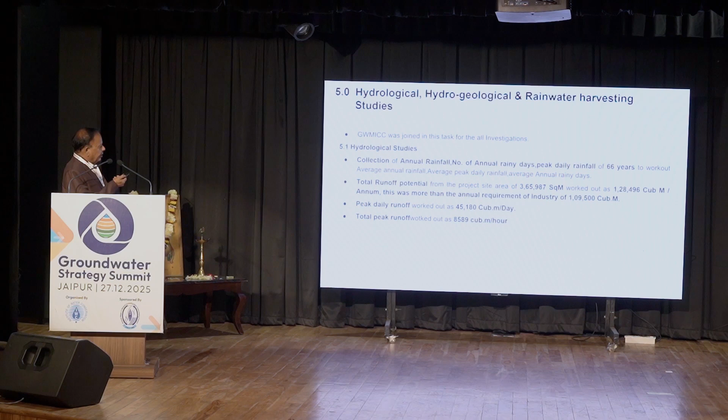The hydrological studies consisted of collection of the annual rainfall, number of annual rainy days, and peak daily rainfall of 66 years to work out the average annual rainfall, etc. The total runoff potential from the project area of 365,987 square meters worked out to be 1,28,496 cubic meters, which was more than the annual requirement of the industry, 1,09,500 cubic meters. The peak daily runoff and the total peak runoff were calculated.

So, how did we implement it? The rectangular drains were designed with a base width of 1.67 meters, a depth of 0.9 meters and a slope of 1:800. Three alternative designs were suggested, out of which design two was approved. It had a 380 meter length, 18 meter width and 8 meter depth with a storage capacity of 54,720 cubic meters and 4 injection wells to recharge the groundwater. Direct utilization could provide 1,12,860 cubic meters per annum, and a recharge capacity of 8580 cubic meters could be generated through the injection wells.

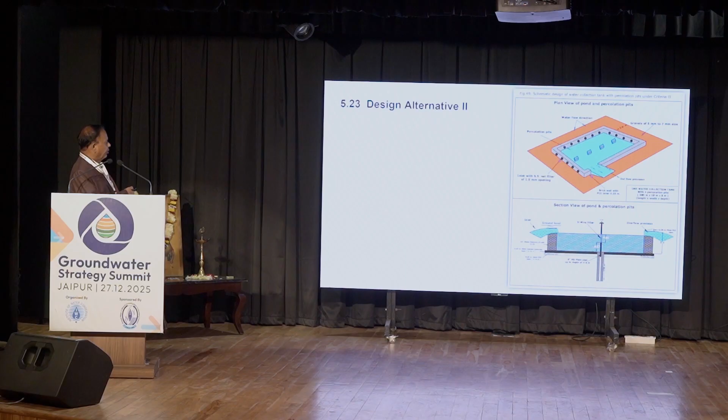This was the approved design, and you can see the rectangular tank with the 4 injection wells. Up to 5.5 meters depth, the water could be stored as dead storage, and 2.5 meters was open through the V-wire filter to go to the groundwater and be used afterwards. This is the layout plan of the approved storage tank and the drains.

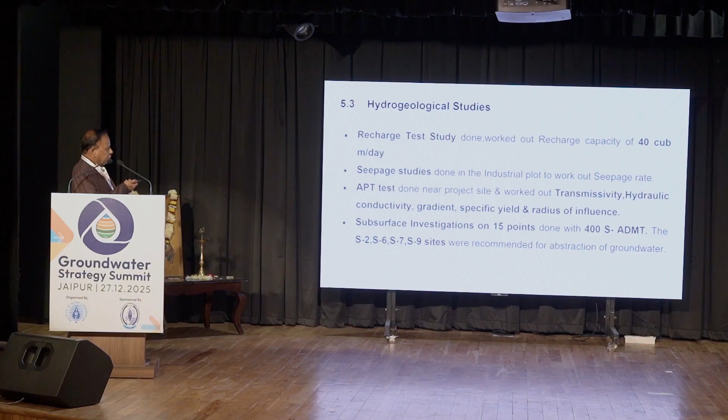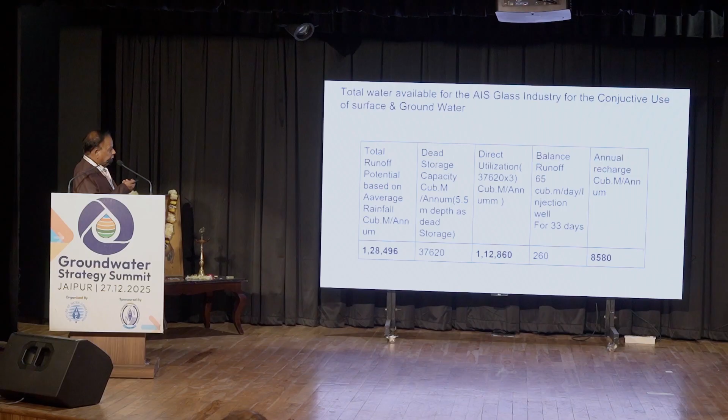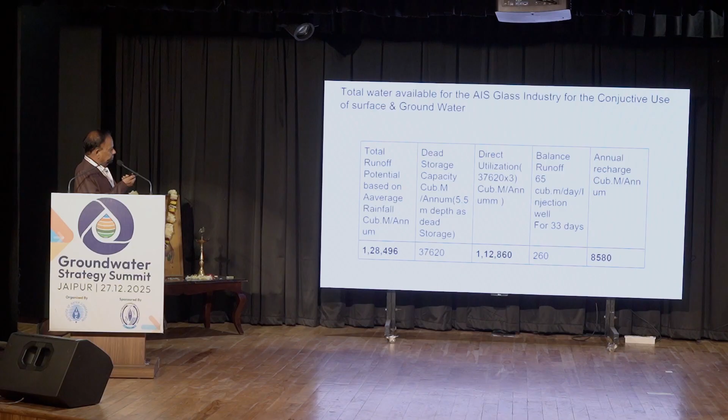This was the net result. The total runoff potential based on the average rainfall was 1,28,496 cubic meter per annum. The dead storage was 37,620, and direct utilization, assuming the tank will be filled 3 times, was 1,12,860 cubic meter. The balance runoff was taken as 65 cubic meter per well, so 260 cubic meter. So the annual recharge was 8,580 cubic meter.

Topographic survey by DGPS and total station. The first strategy was to have the topographic survey by DGPS and total station in this area, 1 kilometer by 2.5 kilometer in the RICO area, and 1 kilometer 100 meter in the Banas area.

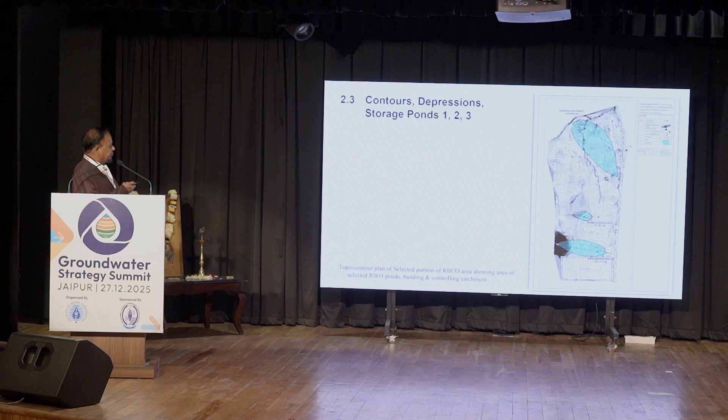On this basis, 3 ponds were selected with a storage capacity of 1,36,905 cubic meter. These 3 tanks were suggested for storage of the water, and this is the Banas River, and these are the contour maps.

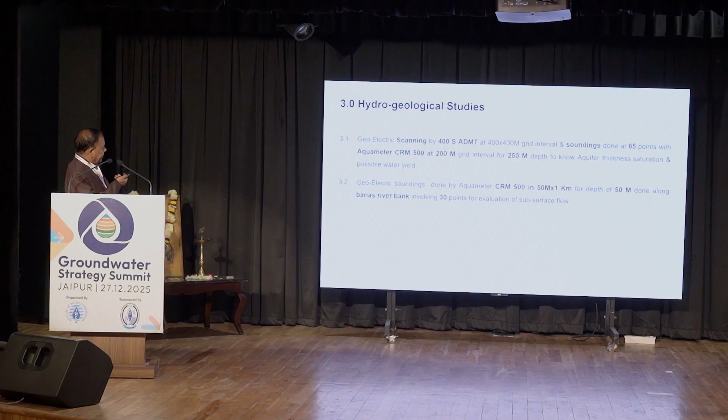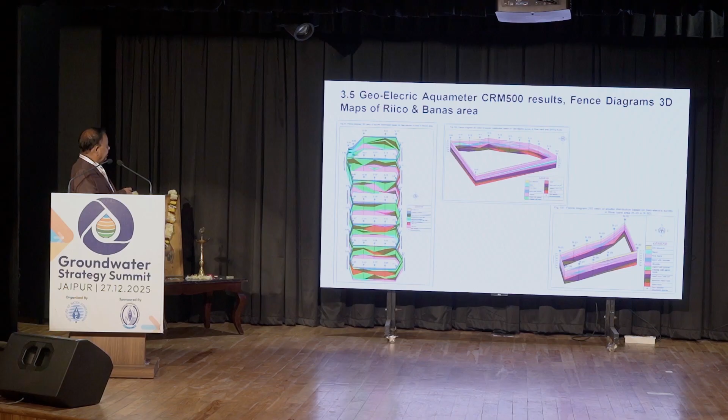These are the 2D maps of sites 64, 53 and 51 in the RICO area, and R13, R25 on the Banas River bank, and these are the fence diagram 3D maps of the RICO and Banas area. For the selection of sites for withdrawal of groundwater, 64, 53 and 51 were found as the best sites in the RICO area, and R13, R25 in the river bank.

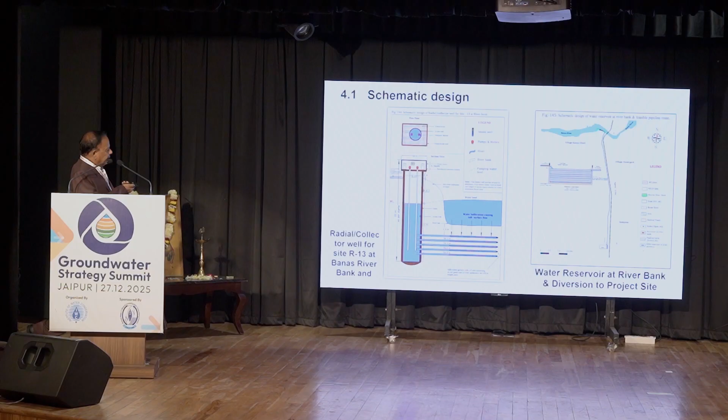The radial collector well for site R13 was selected. This is the radial collector well for site R13 at Banas River, and another one also at the Banas River. The construction of these radial wells, from there the water would be stored in these storage tanks and taken to the project site. So this was the suggestion.

So this was our total study with the total water availability from various proposals. Ponds 1, 2, 3 with the depressions in the RIICO area providing 95,000 cubic meter per annum. Principal aquifers in the RIICO site 64, 53, 51 with 0.14 MCM per annum, and principal aquifers in the Banas River sites R13 and R25 providing more than 400 cubic meter per day.

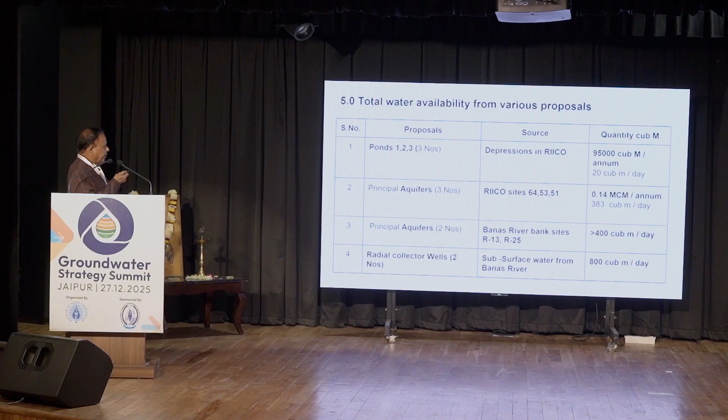And radial collector wells, 2 numbers, were suggested for subsurface water from the Banas River, which could provide 800 cubic meter per day. The interesting point was that this subsurface was the best source for availability of water. All these options were given to the project authority, and they could use any of these alternatives depending on the economics. Thank you very much.

The one thing I would like to say, which I should have said at the beginning, is a very special thanks to Jain sir, and I learnt a lot with Jain sir. It was a wonderful opportunity to work with him.